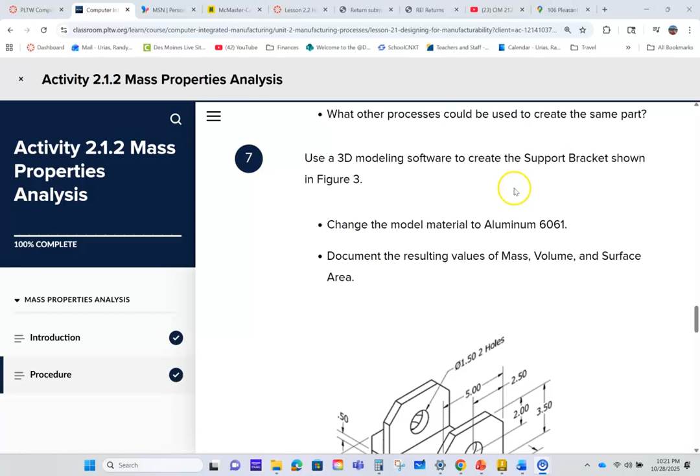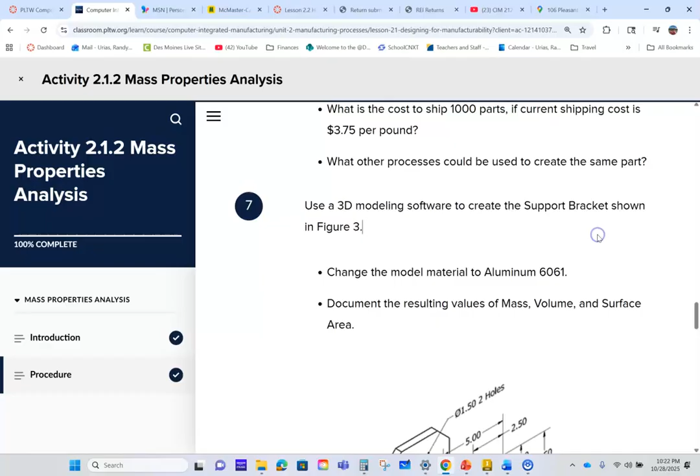Okay, so number 7, part number 3. This one is called the support bracket, and you are supposed to make it aluminum 6061. Let's go ahead and take a look at this thing.

First, let's look at our overalls. I can see that our overall width here is 9. I can see that my overall depth is added up. So my overall height is 0.5 plus 3.5 here. You guys can see right here because this only comes right here, it doesn't add this thickness. So we got to add 0.5 to 3.5 to get the height.

And then our depth here, let's see, is... looks like we got to add, what is that? 5? Is it 5 inches? Nine by 5. There it is, couldn't find it. All right, so 5 inches.

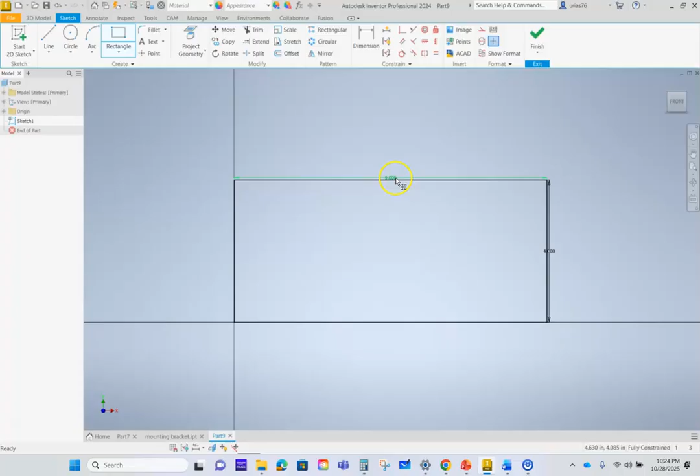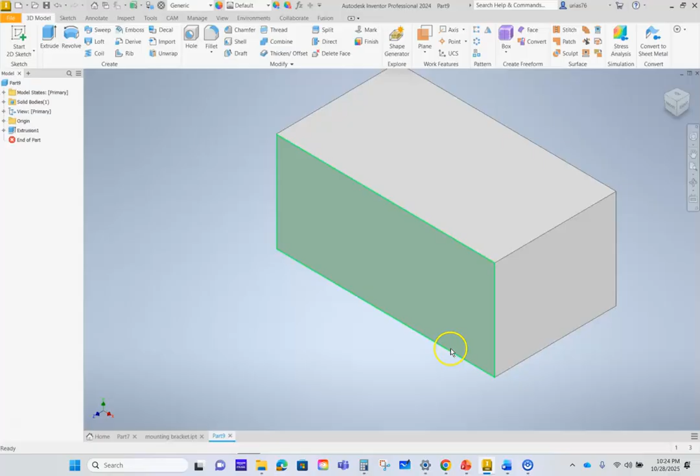I'll bring them out. Okay, let's go ahead and finish our sketch. Let's extrude it, let's bring it into view. I want it to go the opposite direction. Let's go 5. And we got our block. Okay, let's go ahead and click this face here.

And now let's look at this thing. Well, if this center one is 4 inches, that's the cutout, so we can see that. Well, then we see this 2 inch right here, so I can see that this 2 inch is this area right here, right? And we've established that this is 3.5. So then this cutout is going to be 2 by 3.5, 2 by 3.5, and then 4 inches. And then I can see the thickness of this thing is 0.5, I believe. 4 inches from there, 2 inches, 4. Yep, 0.5, there's the thickness.

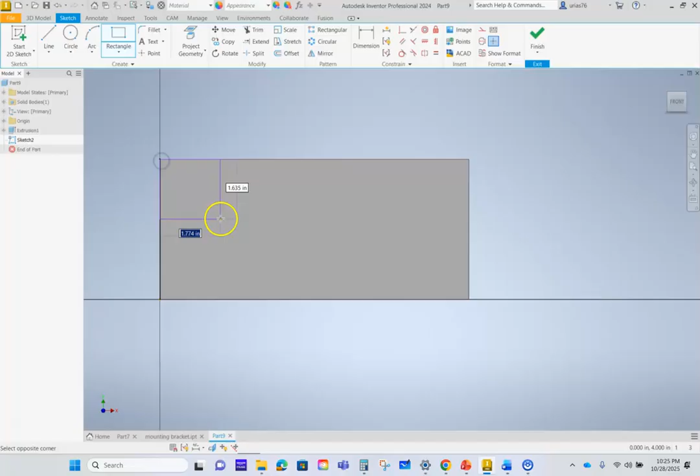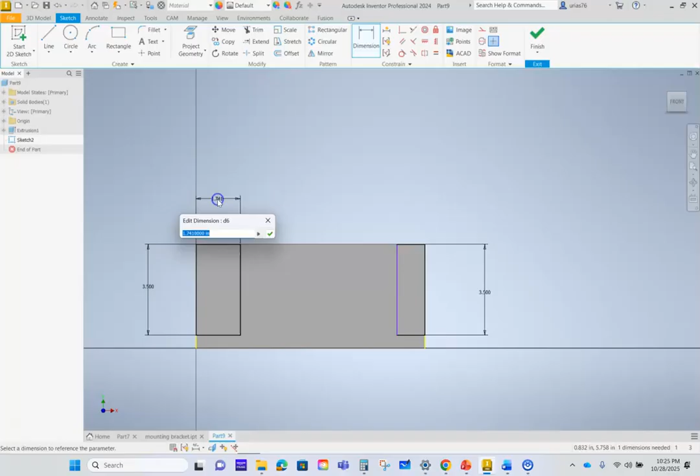All right, so let's go ahead and get our rectangle. We're going to start right here. Doesn't go all the way down. There we go. And we said that this one is 3.5, and this one is 3.5. And we said that this is 2, 2. All right, now we're going to get a rectangle.

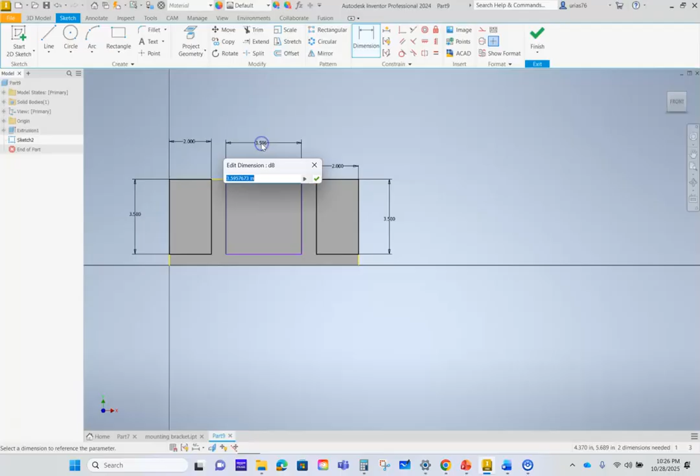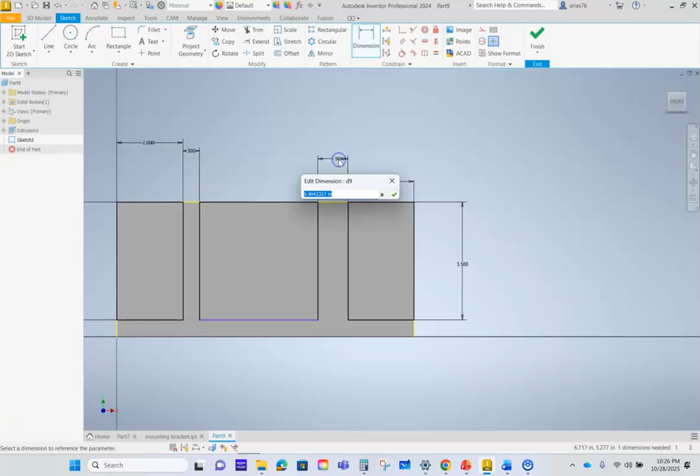We said that the rectangle is 4. Actually, let's do Control Z on that. And then let's dimension this, this is a better way to get that measurement. That'll lock that in place and give us black lines, which means it is fully dimensioned. Cool, cool. And now we just got to do this one. Enter. Everything's black, that means it's fully dimensioned and ready to be cut.

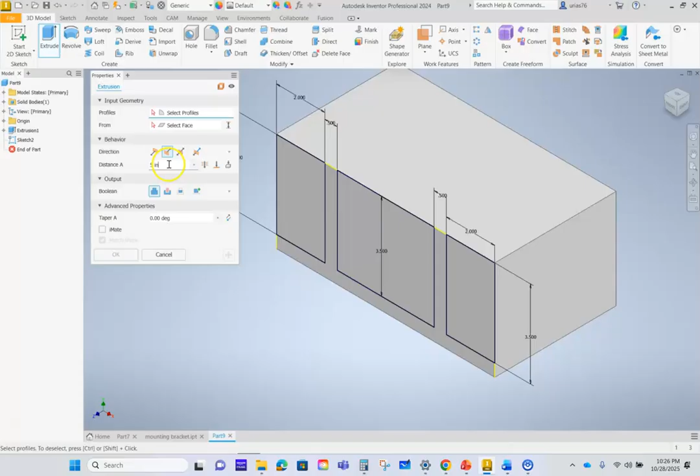So let's go ahead and hit this. It says here, let's extrude. We're going to cut everything out, this and this. Boom, that's what we got so far. All right, so we can see this is working.

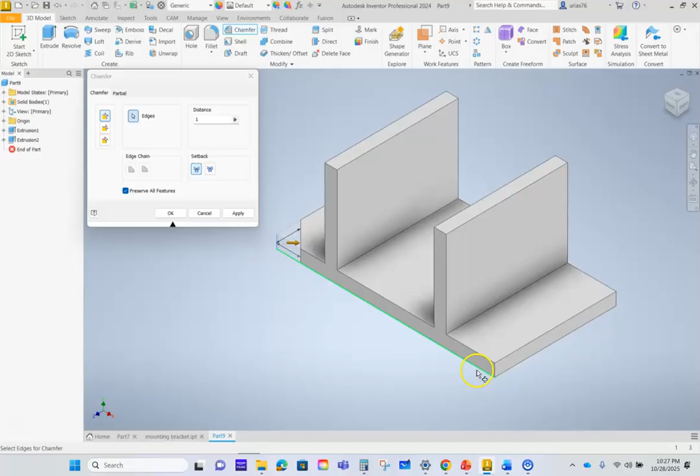Then it says here, chamfers are 1 inch by 1 inch typical, and slots on both sides. So here's our slots, and then we got chamfers that are 1 inch all the way around. So let's go ahead and take care of that, that's a pretty easy one to do. So we'll go ahead and grab this deal. It says here what? It said it's 1 inch. Where? There, there, there. Spin around, and there. Apply it, cancel, home.

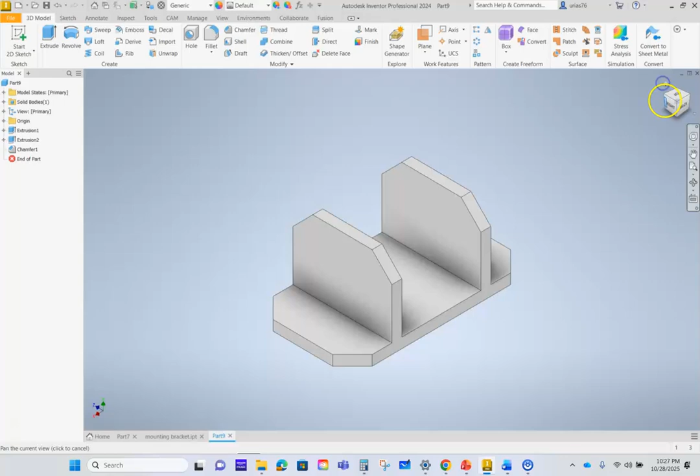And you can see that this thing is fully done. Okay guys, all right. Okay, I like it, let's go home.

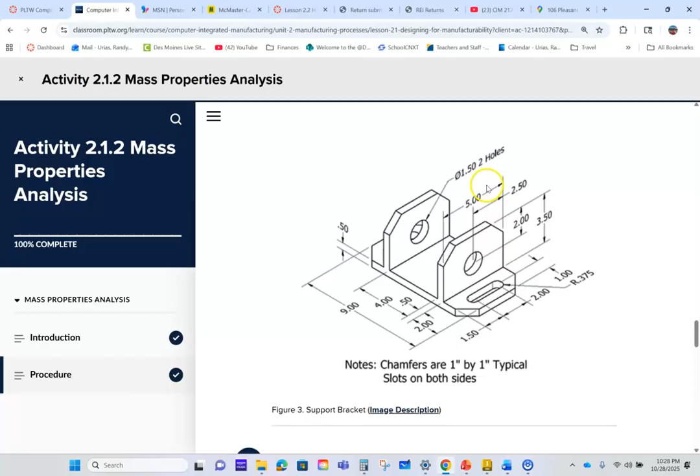Let's click here, we got to get a hole. So here I can see that from here to here is 2.5, and then from here this way is 2 inches, and I can see that the total size of that hole is 1.5. So let's go ahead and get this done. So let's get our circle. Yep, I can see that that is 2.5.

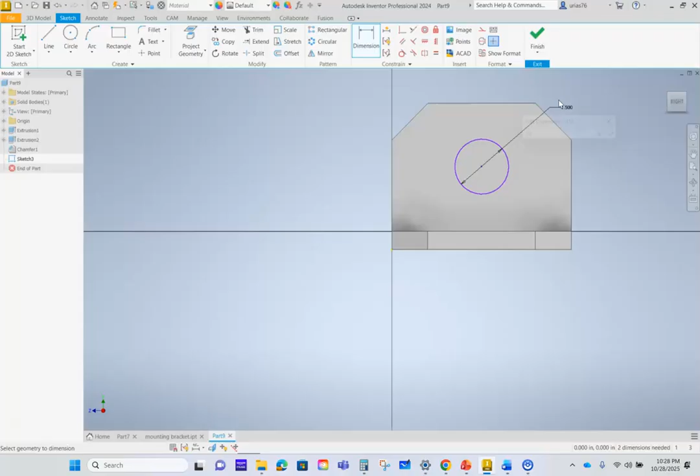There's my 1.5, and then from down it's 2. I've already got it at 2.5 because I watched my X there, right? Yep, there it is. That thing is fully dimensioned.

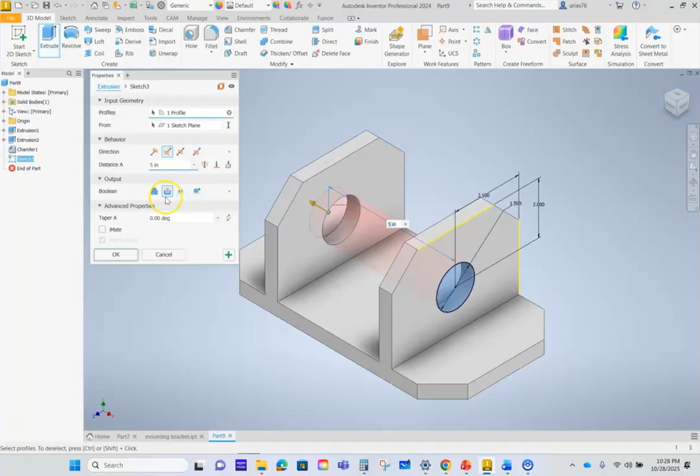Let's extrude it, let's make holes. Boom, there that is. Now we're going to go ahead and slot this thing, so we're going to do a new sketch on this thing.

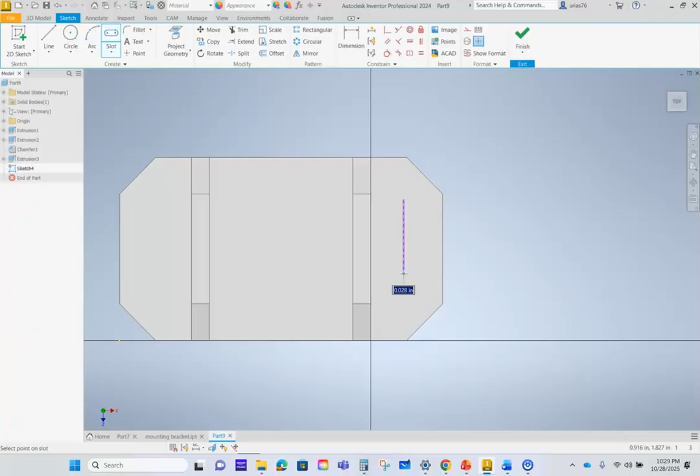Slot. What kind of slot? We want a center to center point slot. So we're going to come up in here, click down. How big is it? 2 inches. We're going to come out. It is 0.75. How do I know?

Well, that's because I go back to this drawing and I'm looking at it. It says here a radius of 0.375. Well, I had to do 0.75 because it was giving me diameter. I wanted to do the diameter of it, not the radius of it, so I had to multiply that number by 2.

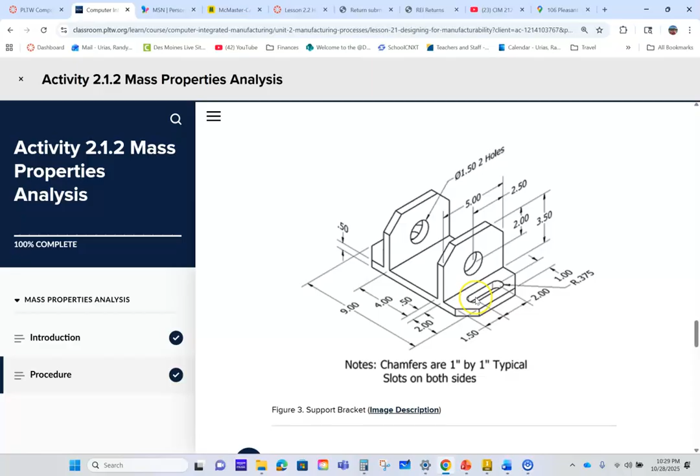Where did I get the 2 inches? This is where I got the 2 inches. Now I got to dimension this thing, which is 1.5 from this line to the center of the first slot hole. Okay, so that looks like this. So that's from here to that center right there, that green dot right there, which is 1.5.

Enter. Okay, we're going to go ahead and finish our sketch. I know it said 2. I'm going to show you a little shortcut here. We're going to cut that. Boom, that is done. Then what we're going to do here, guys, we're going to hit the drop down.

We're going to do a plane. There's a couple different ways to do this to mirror it, but I'm going to use the mid plane here in between 2 planes. So I'm going to select this plane, rotate around, that face, and then that face. And what it does is it gives me a mid plane in between 2 faces.

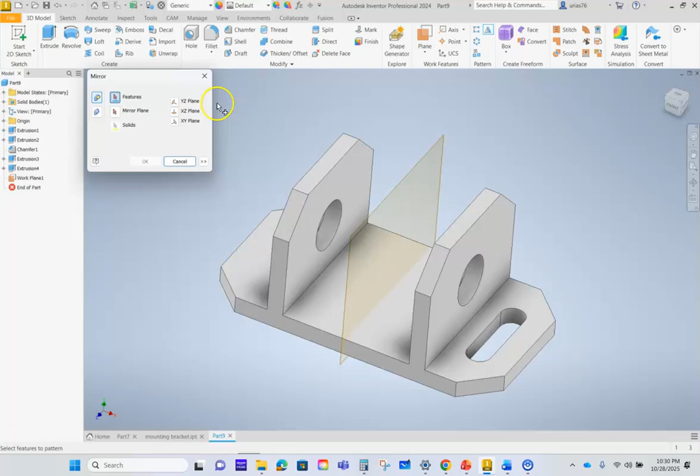So mid plane, or this face and that face, gives me a mid plane. Now I can mirror, so I'm going to go up to mirror, which is this button right here. Mirror it. Right now it says feature. What is your feature? This is my feature. So I got to zoom in so I can get this right. That's my feature. Then select the mirror plane. What's the mirror plane? That's my mirror plane. You can see the slot is in there. Click OK. Boom. The dimensions should have copied straight across.

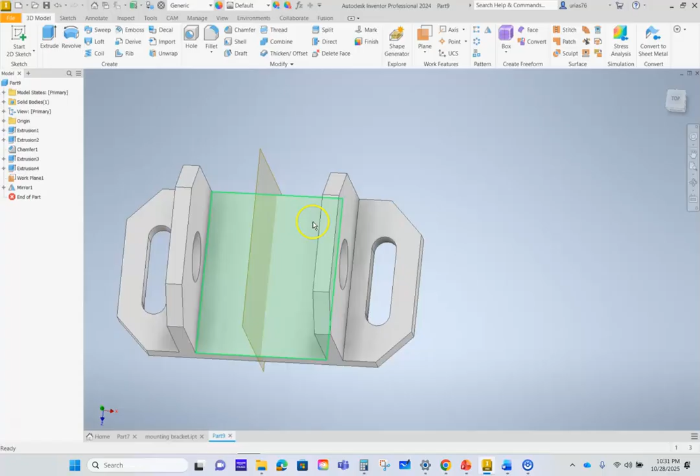Should be the same. Another way that we could have done that is using a mirror line, which is a pretty clever way of doing so also. So I'm going to show you guys how that's done real quick. If we decided to do a mirror line, what we would do is you guys would have to put a sketch on this thing and put a line straight down the center of it. But that's why I think the mid plane is just an easier way to do it. Then all we got to do here is right click, turn off the visibility, and boom, this thing is done.

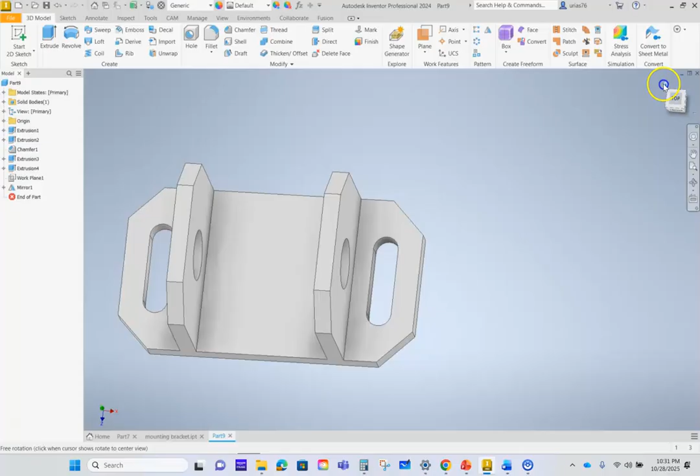What do we got to change it to? We got to change it to, I believe it was aluminum 6061. Boom, there it is. Looks like it's changed.

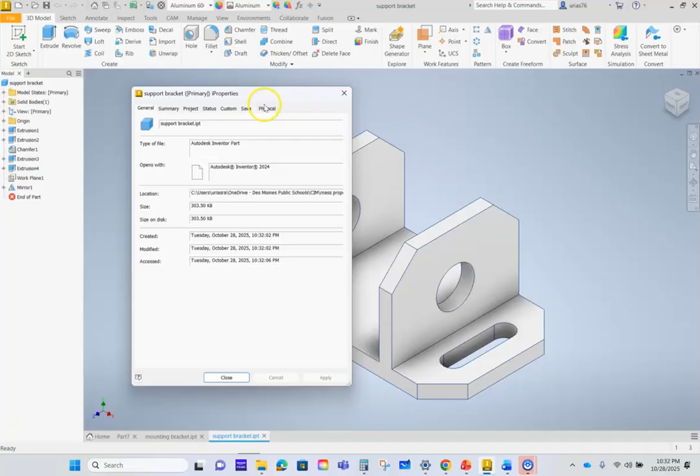File, save as. I think it was called support bracket. Save. Now you guys are ready to do the file, iProperties, your physical, your update. Boom, got some mass. Away you go.